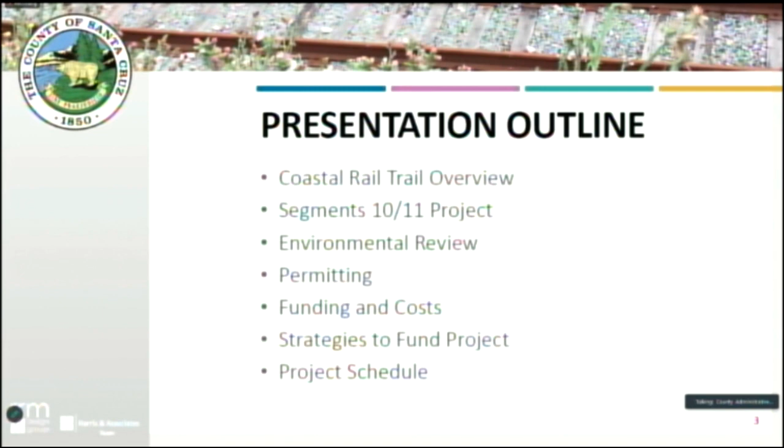Now for a brief Coastal Rail Trail overview. Starting with some background and context, the Monterey Bay Sanctuary Scenic Trail, or MBSST, is a multi-use trail project that extends around the entire length of Monterey Bay in Santa Cruz and Monterey counties. The RTC led development of the Trail Master Plan to identify a trail network in Santa Cruz County that would serve as the MBSST and meet the goals of providing new active transportation facilities and foster appreciation of the coast.

The RTC, as owner of the Santa Cruz Branch Rail Line, which extends 32 miles between Davenport and the northern part of Santa Cruz County to Pajaro in Monterey County, identified a trail along the Santa Cruz Branch Rail Line as the spine of the MBSST network. This 32-mile-long trail is referred to as the Coastal Rail Trail.

The MBSST master plan was adopted by the County of Santa Cruz and the other jurisdictions through which it passes in 2014 and 2015. The master plan organized the trail alignment into 20 segments with logical beginning and endpoints so that it could be constructed in pieces as funding became available.

This slide provides an overview of the Coastal Rail Trail project development. The areas shown in red indicate that the project is funded through construction, and areas in green have been completed. I want to point out two projects in addition to the Segments 10/11 project that the county is involved in. At the northern end of the map is the Segment 5 project, which is being led by the RTC. The project is out to bid, and bids are actually being opened today, I believe at 2 p.m. The county has entered into a maintenance agreement with the RTC to maintain the project once it's constructed.

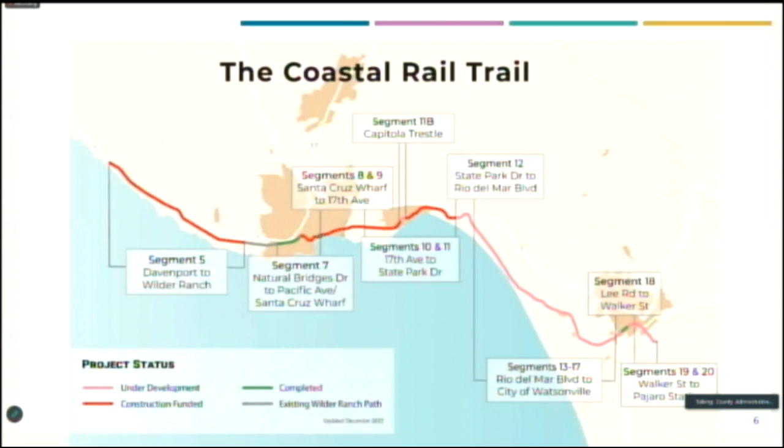At the southern end of the county, the RTC is now engaging with the community to develop Segments 13 through 20 as part of their zero-emission passenger rail and trail project. This will also include the trail and rail alignment over the Capitola Trestle, shown as Segment 11B in the center of the map. Now going to move to a focused overview of the Segments 10/11 project.

This is a map showing Segment 10 in green, which starts at 17th Avenue and goes to 47th Avenue. The Capitola city limits are overlaid on the map for reference in dark gray. Segment 11, shown in purple, starts at 47th Avenue and passes through the city of Capitola and New Brighton State Beach before ending at State Park Drive. All told, Segments 10 and 11 are 4.7 miles long.

The project includes a phased approach to trail development. Under the phased approach, there are two different ways in which the rail corridor could be developed with the trail: the ultimate trail and an optional interim trail, both of which are included in the environmental impact report as part of the proposed project and therefore analyzed at an equal level of detail. The first way to develop the trail is shown on the screen, and that is to proceed directly to building the trail next to the rail line, which we're calling the ultimate trail configuration.

This is consistent with the MBSST master plan and is also the configuration for which the county applied for and received ATP grant funding. With the ultimate trail configuration, the existing rail line is preserved. The trail is built next to the tracks, maintaining the required offset distance from center line of tracks.

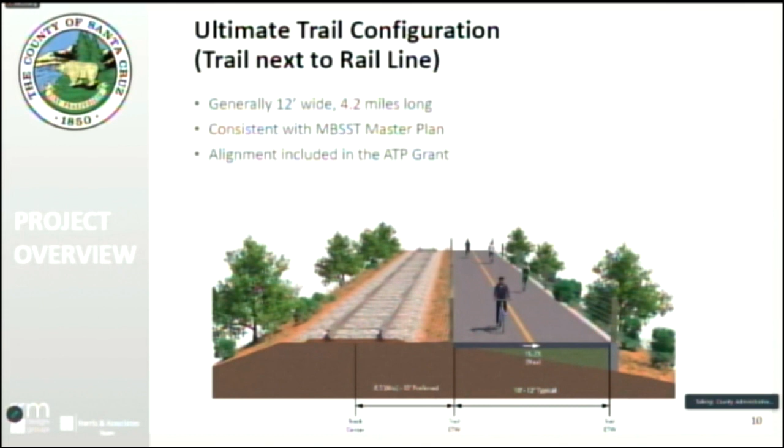The trail is generally 12 feet wide, but is reduced in some areas due to constraints and widened in others where there is room. Fencing is required on the side of the trail next to the rail line and on the far side of the trail where grade changes make it necessary for safety, like shown in the image on screen on the right. Under the ultimate trail configuration, the project is 4.2 miles long and would include new bicycle pedestrian bridges.

The second way in which the corridor could be developed is to implement an optional first phase as part of the project, where the existing railroad tracks are removed and an interim trail is built on the rail line. This approach would require rail banking of the corridor in order to be able to remove the railroad tracks. Under this scenario, the trail is generally 16 feet wide, but is reduced to 12 feet in several areas due to constraints. Fencing is not required with this option, except where grade changes make it necessary for safety.

Under the interim trail configuration, the project is 4.7 miles long because it includes half mile of trail across Soquel Creek on the existing Capitola Trestle. The existing rail bridges would be converted to bicycle and pedestrian use. If the rail line were later reactivated, the optional first phase would be followed by future parts where the interim trail is removed, the railroad tracks are rebuilt, and the new trail is built next to the rail line in the ultimate trail configuration.

There have been a number of questions and comments from the public about why the project includes the interim trail, given the results of the Measure D vote in June of 2022. The county included the optional interim trail because it was requested during the EIR scoping process, which occurred in November of 2021 prior to the results of the 2022 Measure D vote. And further, the county included the optional interim trail in the EIR to provide maximum transparency to the public and decision makers about the environmental impacts and the design of the two alignments.

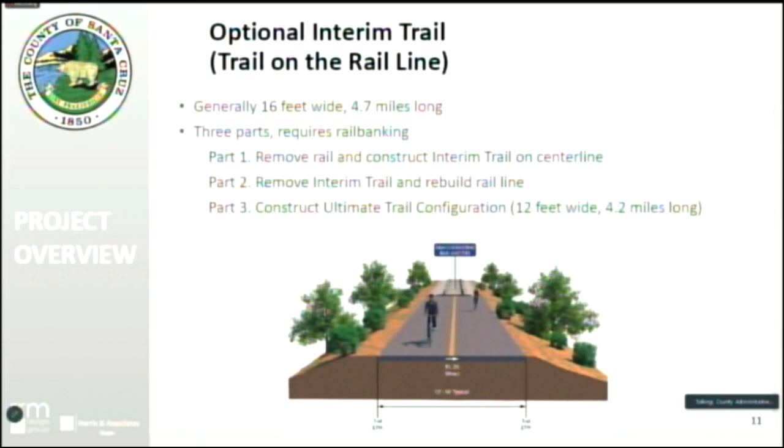But now I'm going to get into more detail on Segment 10. The project includes a new north-south crossing of the rail line between Chanticleer and Corcoran to improve bicycle and pedestrian connectivity in this neighborhood. The trail will also connect to Thompson Avenue on the north side of the tracks. At Rodeo Gulch, the ultimate trail will feature a new bicycle pedestrian bridge, and the interim trail will convert the existing rail bridge to trail use.

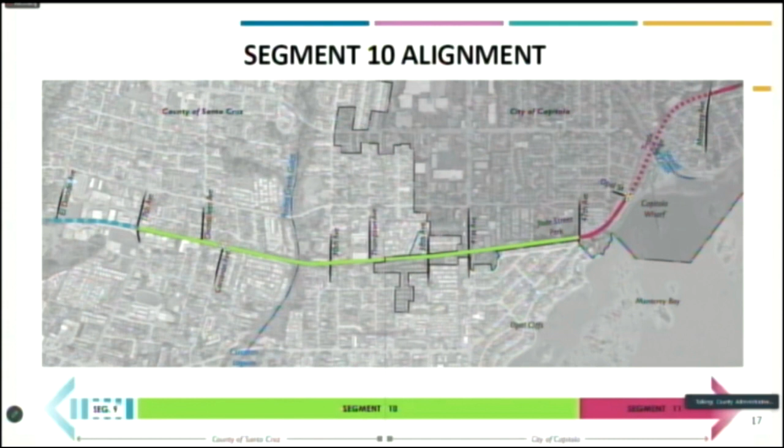There will be new trail crossings at 30th, 38th, 41st, and 47th Avenue, which will have cross bikes and activated flashing crossing lights to alert drivers. And I'll show an image of those improvements in a couple slides. The ultimate trail is located on the inland side of the tracks for the entirety of segment 10, and then switches to the coastal side of the tracks at 47th Avenue, where segment 11 begins.

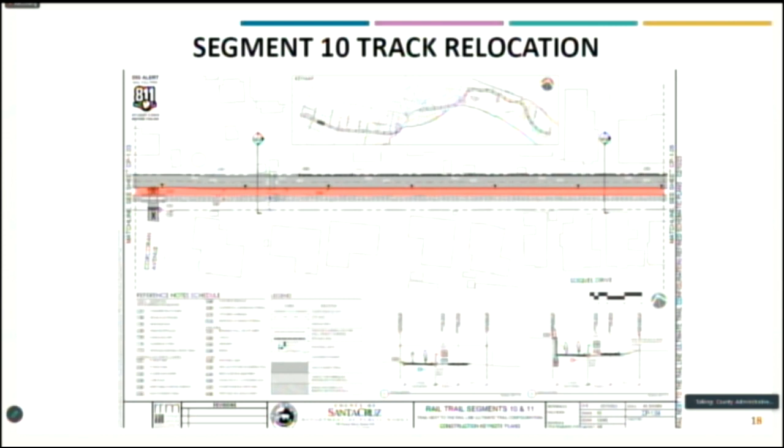The ultimate trail configuration also includes relocating the railroad tracks for almost the entirety of segment 10 from where they are currently located in the center of the corridor, which is shown in red on the plans on your screen, to between 5.5 to 8 feet towards the south or the coastal side of the right-of-way in order to fit both the trail and the tracks in this narrow corridor.

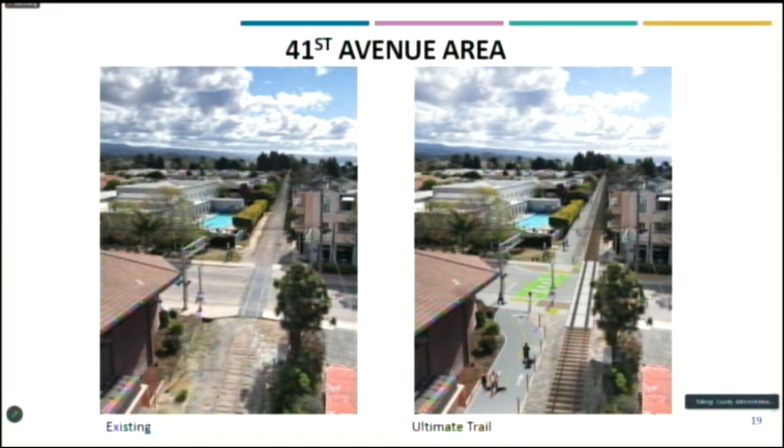These are two views of the 41st Avenue railroad crossing looking east. The image on the left is existing, and the image on the right is with the ultimate trail and the relocated track. In the image on the right, widened sidewalks have been added on both sides of 41st Avenue, which shortens the crossing distance and improves the visibility of trail users as they wait to cross the street. As with all the crossings, green cross-bike pavement markings and LED flashing pedestrian crossing signs will be added to improve safety. These will be similar to the existing intersection improvements that are already built on portions of the rail trail in the city of Santa Cruz.

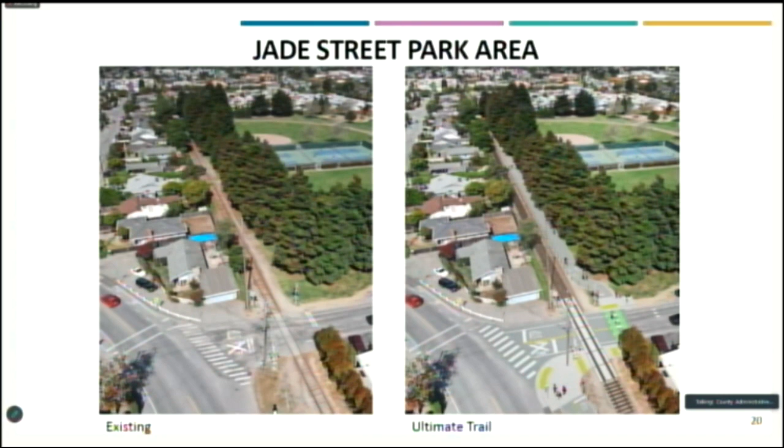Segment 11, shown in purple, starts at 47th, continues on the coastal side of the railroad tracks to Opal Street, where a new improved and widened concrete staircase and formalized rail crossing connects to Opal Street in the Jewel Box neighborhood. The plans for the area are shown on the right of the screen in the image. The formal rail crossing will be subject to CPUC approval, but we think has a good chance of being approved due to the high volume of historic use.

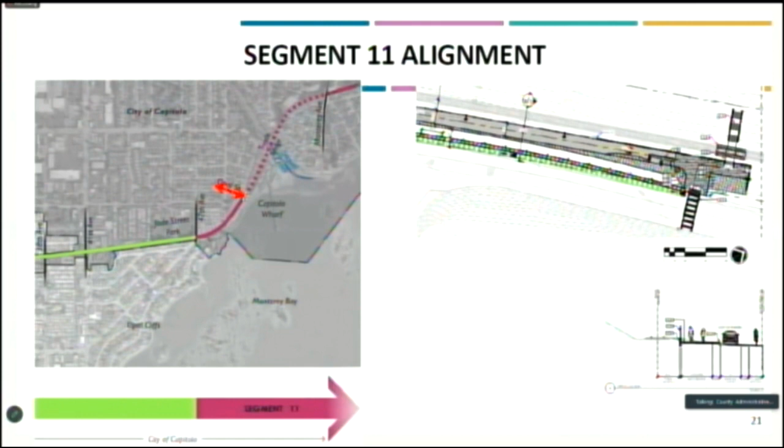This is also where the ultimate trail transitions to using existing sidewalks and bike lanes through Capitola Village, and the interim trail continues over the Capitola Trestle, which I'll describe on the next couple slides. Under the ultimate trail configuration, the trail ends at Cliff Drive, and trail users will be directed to use existing surface streets, bike lanes, and sidewalks through Capitola Village and up to the Monterey and Park Avenue intersection, where the trail restarts.

A new trail bridge over Soquel Creek was excluded from the ultimate trail configuration due to the infeasibility of cantilevering a trail bridge from the Capitola Trestle, like was done at the San Lorenzo River, as well as the difficulty of constructing a standalone trail bridge due to the limited right-of-way next to the existing bridge. So due to these constraints, the RTC is proposing to replace the existing trestle with a new combined rail and trail bridge over Soquel Creek as part of their zero-emission passenger rail and trail project.

The segments 10 and 11 project will be improving the existing bicycle and pedestrian infrastructure along the route shown on the screen in green through several methods. Most significantly, the project will be restriping a roughly 350-foot long section of Cliff Drive from the end of the trail to the start of the existing sidewalk on Cliff Drive in order to create a separate 4-foot wide pedestrian path next to a 5-foot wide Class 2 bike lane, creating separation between cyclists and pedestrians where currently there is none.

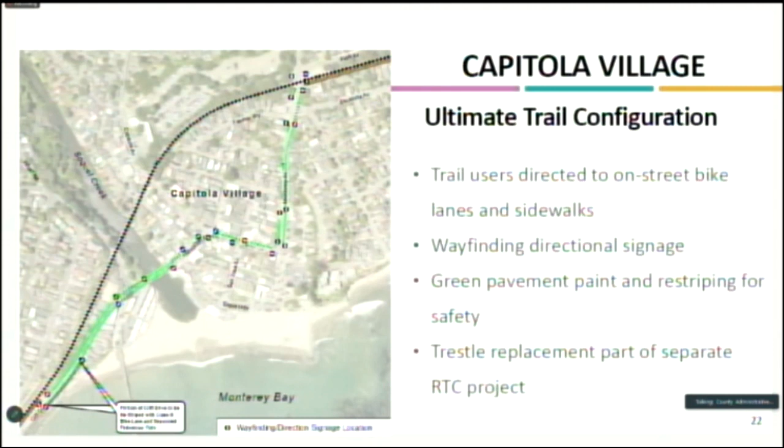Similar to other portions of the rail trail, like in segment 8 in front of the boardwalk, where there are existing bicycle facilities that are part of the trail, the project will be adding green paint to the existing Class 2 bike lanes and Class 3 bike sharrows to improve the visibility of cyclists and better delineation of the bike infrastructure. And the project will also be installing rail trail branded wayfinding signage through the village to help trail users navigate from one end of the trail to the other.

Alternatively, with the optional interim trail configuration, trail users would remain on the rail alignment over the Capitola Trestle and continue to Monterey and Park. This would involve removal of the tracks, making necessary structural repairs to the trestle, and then conversion of the structure to a bicycle and pedestrian bridge. In addition, the conversion of the trestle to a trail bridge is included as part of the ultimate trail configuration under design option A in the EIR.

Under this hybrid scenario, the ultimate trail would be implemented up to Opal Street and then transition onto the alignment of the existing tracks, which would be removed. The trestle would be repaired and converted to trail use, just like with the interim trail configuration, and then the trail would transition back to the ultimate trail on the coastal side of the tracks, just past the Monterey and Park intersection. The inclusion of design option A provides environmental clearance under CEQA for the trestle conversion as part of the ultimate trail project, and therefore maximizes flexibility for decision makers to determine the best future use of the trestle.

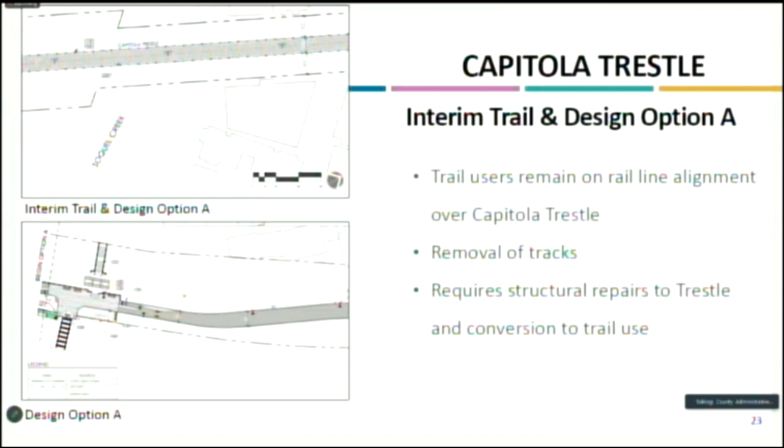Moving east out of Capitola Village from Monterey Avenue, segment 11 passes through the narrow rail cut to Grove Lane and along the Park Avenue bluffs. At Coronado Street, a new ramp will connect the trail to the Park Coronado intersection and the New Brighton State Beach parking lot.

The project then crosses New Brighton State Beach Access Road on either a new bike ped bridge for the ultimate trail or a converted existing rail bridge for the interim trail. It then passes below the State Beach Campground, across New Brighton Road, traverses the Porter Sesnon open space to Estates Drive, and continues into the Seacliff neighborhood where a trail connection is proposed at Poplar Drive, and the project ends at State Park Drive.

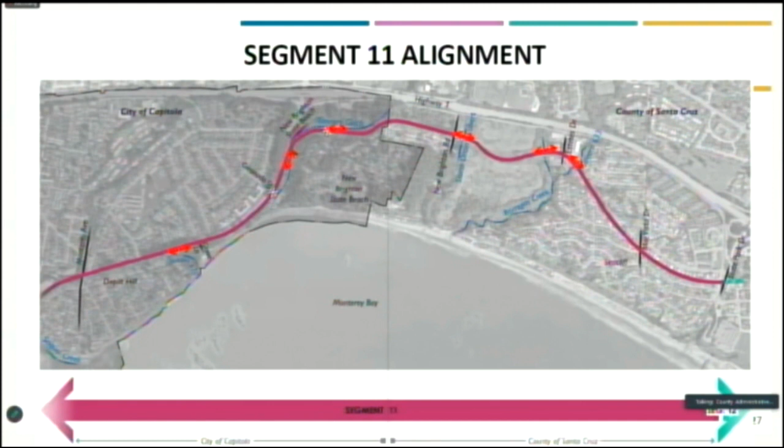Segment 11 includes new trail crossings at Grove Lane, New Brighton Road, Estates Drive, and Mar Vista Drive, which, similar to segment 10, include cross bikes and activated flashing crossing lights where needed. The ultimate trail is on the coastal side from Monterey to Mar Vista and switches to the inland side from Mar Vista to State Park Drive. It includes several viaducts over the stream crossings shown on the map in red and large retaining walls in several places to deal with the adjacent steep topography.

Speaking of steep topography, from Monterey to Grove Lane, the steep hills and abundant trees in this area make this one of the more challenging portions of the project. The design team explored 3 different alignments for the ultimate trail in conjunction with the City of Capitola and RTC staff to determine which alignment had the least environmental impacts. We looked at the trail on the inland side of the tracks, the trail on the coastal side of the tracks, and a trail along Park Avenue at road grade. The trail on the coastal side of the tracks requires the least number of tree removals and has the least impacts, and that is the proposed alignment.

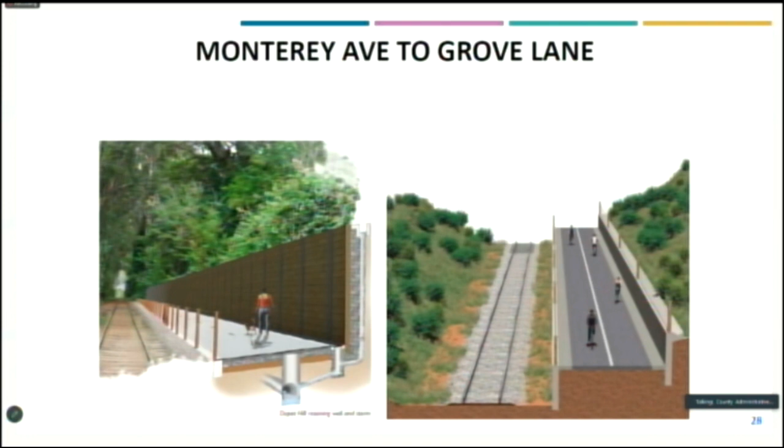However, the steep topography necessitates the use of retaining walls to hold up the slope. The original design shown on the left utilized a single tall retaining wall, and the latest designs shown conceptually on the right utilize 2 smaller walls to raise the trail above railroad grade, which reduces cost, avoids the need for underground anchors below adjacent private properties, and makes the walls less imposing to trail users.

Between Grove Lane and Coronado Street, the project added design option B, which places the ultimate trail on the inland side of the tracks as opposed to the coastal side, at the request of the Coastal Commission due to concerns over bluff erosion at this location. The project team is currently working with the RTC and Coastal Commission staff to determine how estimates of bluff erosion in concert with sea level rise might impact the project and influence the Coastal Commission's approval of the project.

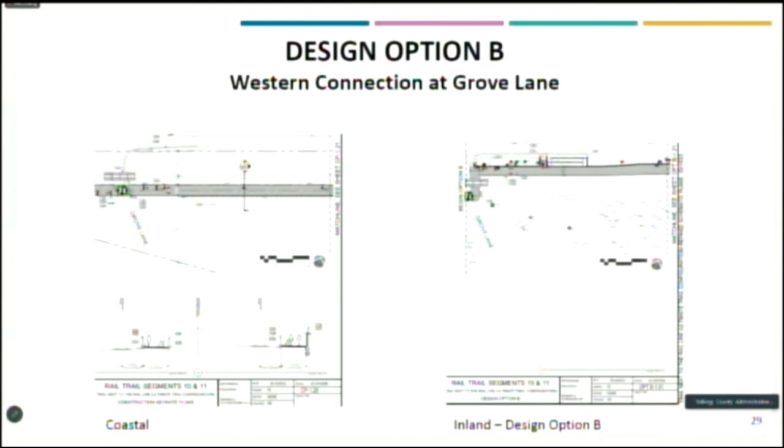In the images on screen, the ultimate trail configuration is shown on the left and design option B is on the right. And these first images show how the 2 alignments would connect to Grove Lane and the existing sidewalks on Park Avenue. The second images show how the 2 alignments would provide an ADA accessible trail connection to the Park Coronado intersection and a new formal crossing of the rail line. Like the Opal Street intersection, this new crossing is subject to CPUC approval. But again, with the well-documented existing use, we think the crossing is likely to be approved.

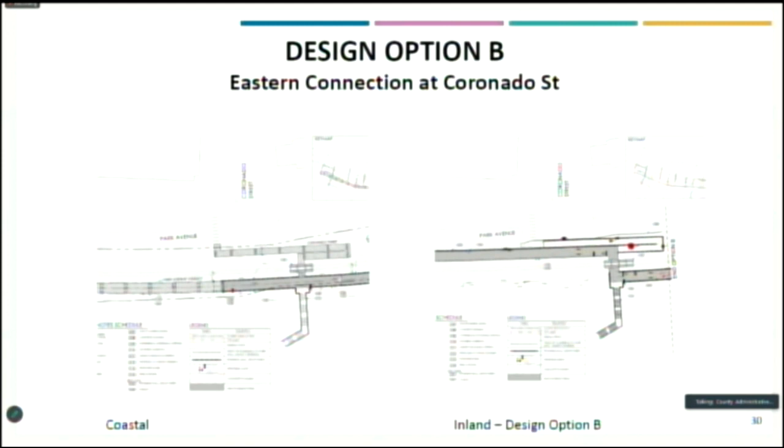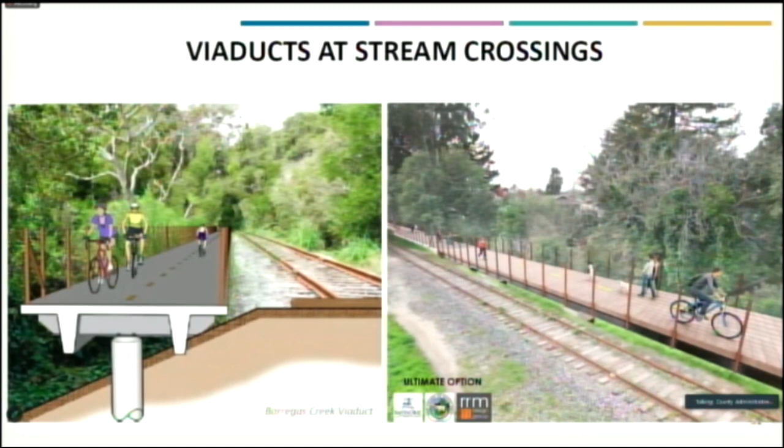The project is also working with state parks to improve the highly popular and also highly eroded informal access trail to New Brighton with a concrete staircase so people can more easily get from the trail and neighborhood to the beach. And then finally, this last slide shows some example conceptual images of the viaducts that are proposed for the ultimate trail configuration over many of the stream crossings or where the adjacent rail line is built on a steep embankment. These avoid the need to build large retaining walls that would result in greater tree removal and greater impacts to riparian habitat.